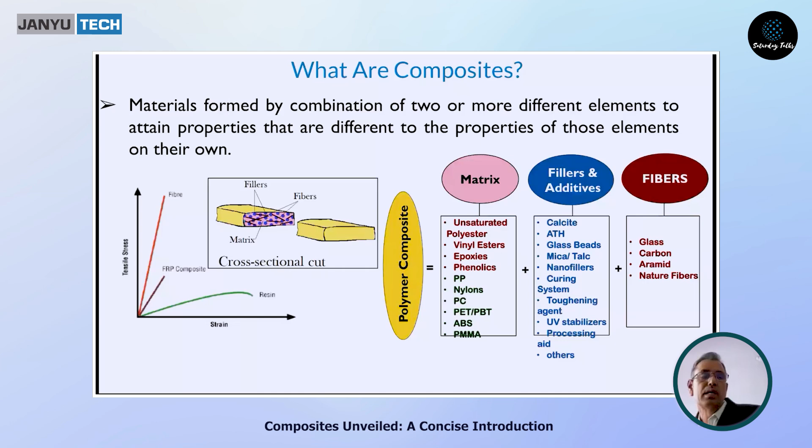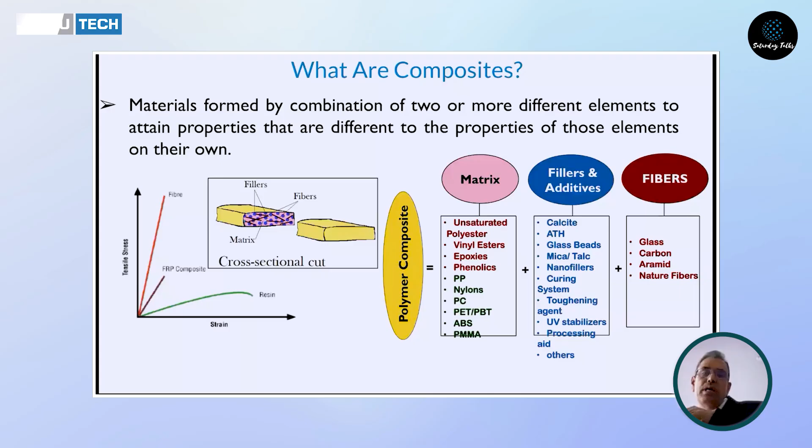So depending on the matrix material, composites are three types: polymeric composites, metallic composites, and ceramic composites. Ceramic matrix composites, metallic matrix composites, and polymer matrix composites, or plastic matrix composites. Today, we shall predominantly talk about polymer matrix composites. The material we use for composites we generally call resin material, either thermoset or thermoplastic.

So, what is the performance of the resin material we should look for when we are designing a composite material? The type of resin will definitely be an important parameter. Type of material, what type of strength, stiffness, and other performance you are looking for, whether structural or semi-structural. If it is a commodity polymer, your performance will be something. If it is an engineering polymer, your performance requirement will be different.

If it is unsaturated polyester resin for general purpose application, there are so many types of unsaturated polyester resin: for general purpose, for special purpose, for structural, semi-structural. Isoresin, orthoresin, vinyl ester resin, maleic resin, all those things. Whether you are looking for chemical resistance, just a general purpose application, a class A type of application for vehicles, high toughness, or high stiffness, it depends on that.

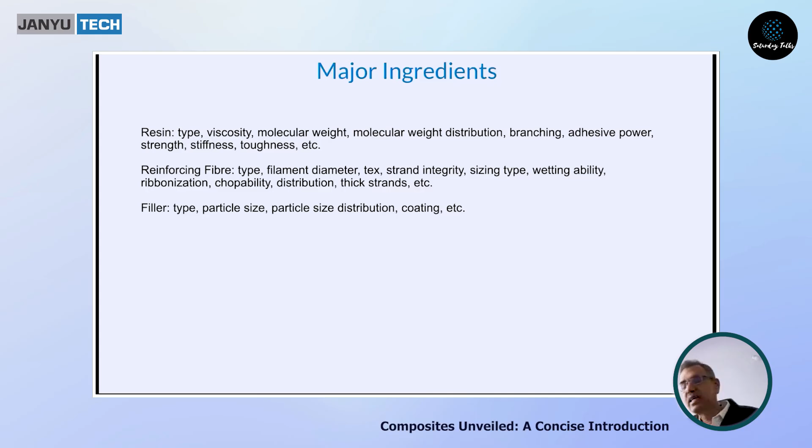Okay, I will tell you one thing, how to understand the composite in simpler terms. I will tell after some time.

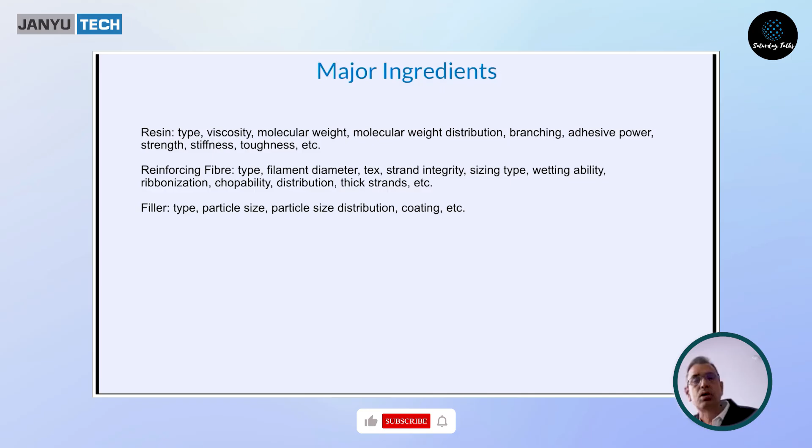So sizing is actually the material which is used for compatibility with different polymers. So for compatibility with different polymers, sizing is also different. And sizing is the major technology in glass fiber. Sizing will either make or break the composites, and this is very, very proprietary. Sizing cannot be done by each and everybody. It's very, very specialized.

So we are drawing the glass fiber in that diameter and with enormous speed. It gets melted at 1650 to 1700 degrees centigrade. Then it gets filtered. Then fiber drawing happens at nearly 1150 to 1200 degrees centigrade through a platinum, gold, iridium metal bushing. The bushing may have 2400 to 4800 small holes of that diameter.

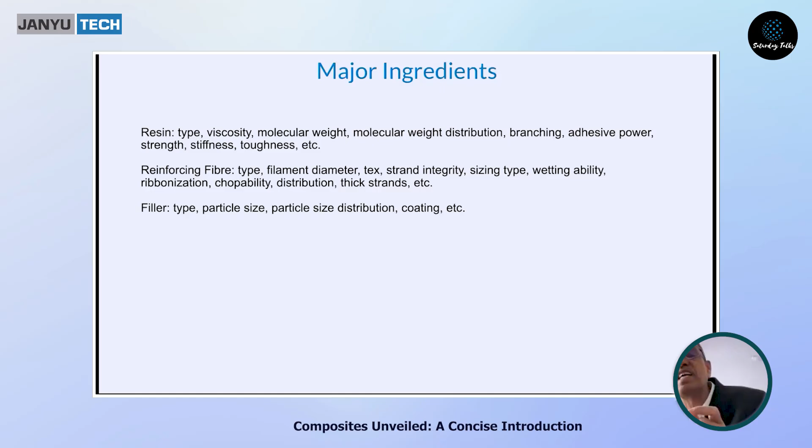Immediately below that, it is generally an AC room. Fiber drawing is in an AC room. When it is coming out of the bushing, the room temperature is maintained at 22 degrees centigrade, and when it comes out, if we don't coat it, it will be like a needle. So it gets coated with a sizing formulation, and then it gets wrapped around a bobbin at very high speed, and then drying and post processing, all those happen.

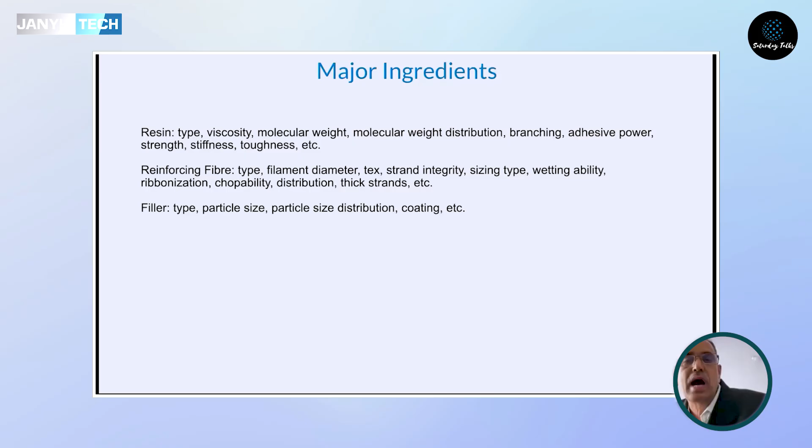So each lock has a specific key to open it. You cannot unlock any lock with any key. There is a specific key for a specific lock. Similarly, for a specific polymer matrix, if it is polypropylene, ABS, polycarbonate, polyphenylene sulfone, unsaturated polyester, epoxy or bismaleimide, whatever the case may be, for each type there is a special type of sizing. So if you miss it, it's just like trying to unlock a lock with a different key. So this is very important.

One of my bosses used to tell me, "Are Sajal, glass fiber is glass fiber. So why this compatible, that compatible, how does it come?" And then wetting power of the filament is important, and this depends on what type of...

Before that, I would like to add sizing type and strand integrity. Sizing is a formulation. It contains maybe half a dozen to a dozen different types of chemicals, generally water based, so that there is no harmful VOC. One is the primary film former, which coats the glass fiber. Then there is a secondary film former, which reinforces it.

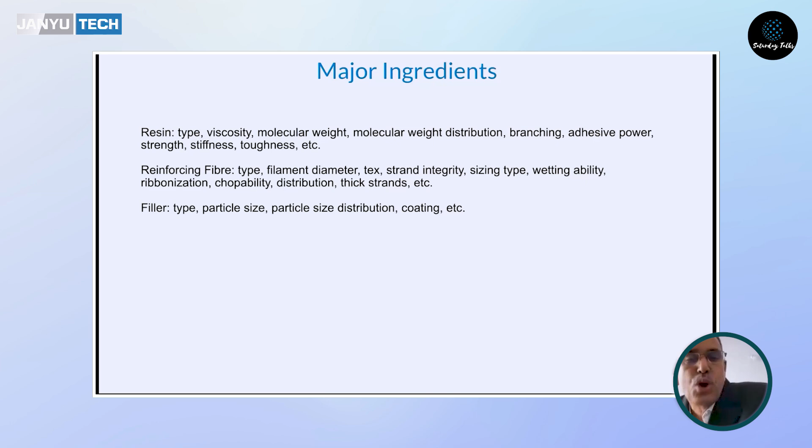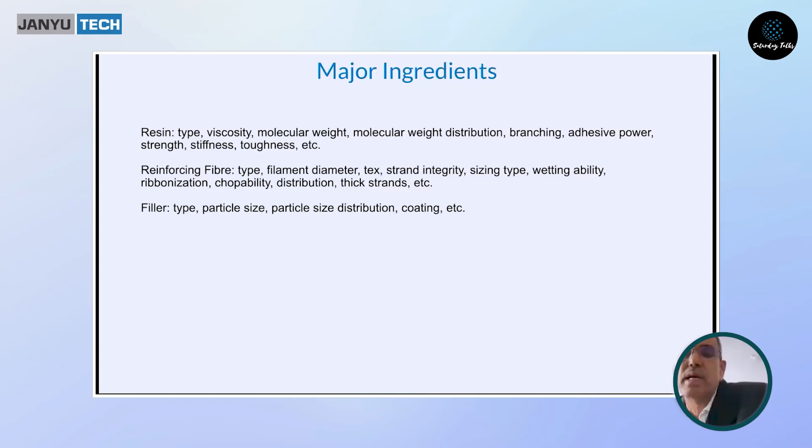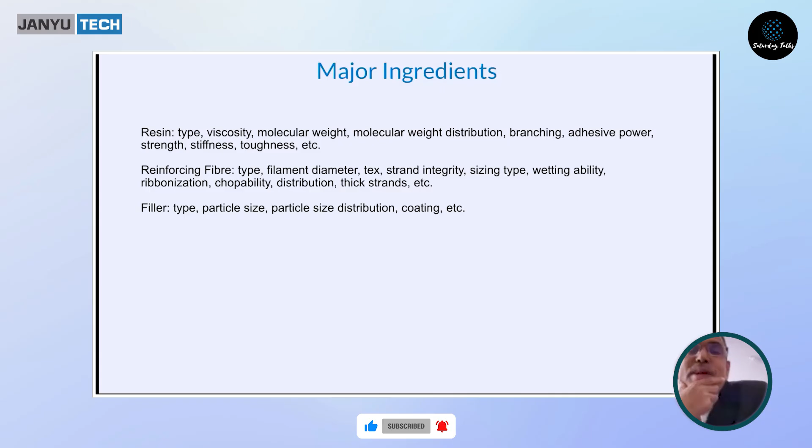If you take a typical resin material, the tensile modulus is 3 GPa, whereas the tensile modulus of E-glass filament is 72 GPa. And the resin's tensile strength is 50 to 60 MPa, whereas the tensile strength of glass fiber is many times higher than this. So in a composite combination, fiber plays the dominant role in determining the strength and stiffness of the composite material. So if we are looking for an application where tensile performance will be predominant, we should look for proper reinforcing. And sizing plays a very crucial part.

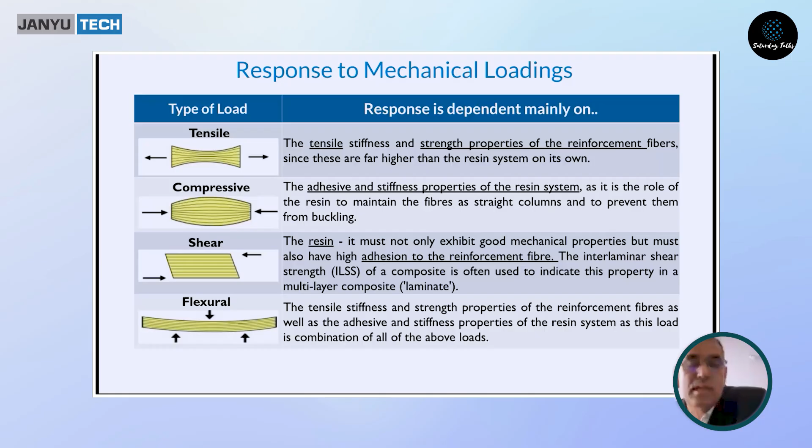Tell us some simple examples: what is the major reason for using a composite? One I can understand straight away is weight reduction. In an automobile, you want steel to be replaced by fiber because it will have the same strength but lower weight. And then you also talked about conductivity. You want an item which is insulating and not conducting, so you make a composite which is insulating in the case of electronics, etc. But sir, what else could be the reason for composites?

Sir, specific strength and specific stiffness, that is, strength and stiffness divided by specific gravity. That is much higher for composites than steel. Corrosion is a very big factor, no sir? Yes, then corrosion and dent resistance. Composites have very good dent resistance. That is why we can export even painted parts. You cannot do this with steel.

Denting is very important. Plus, the number of tools required for composites is much less. So tooling cost is nearly 35 to 45% lower, and you require fewer tools. You can have a lot of integration of parts. So where for steel you require maybe a dozen or half a dozen tools, here you require only a single tool.